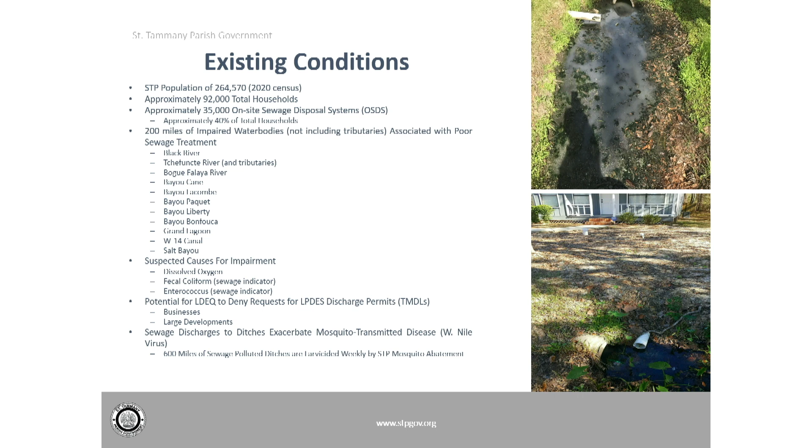This is a list of the impaired water bodies in St. Tammany Parish. It's called the 303D list. 303D is in direct reference to the section that this list is in the Clean Water Act, and it's maintained by the EPA. Now, I know you can't see that, so this next slide is a blow up of that.

So the left-hand column, the first yellow left-hand column, at the top it says PCR. That stands for Primary Contact Recreation. So each of those yellow N's means that that section of water body is impaired and is not meeting the primary contact use designation.

If you go all the way to the far right column, you can see what it's impaired for, the suspected cause of impairment. You can see sewage discharges in unsewered areas, on-site treatment systems, septic systems, and similar decentralized systems.

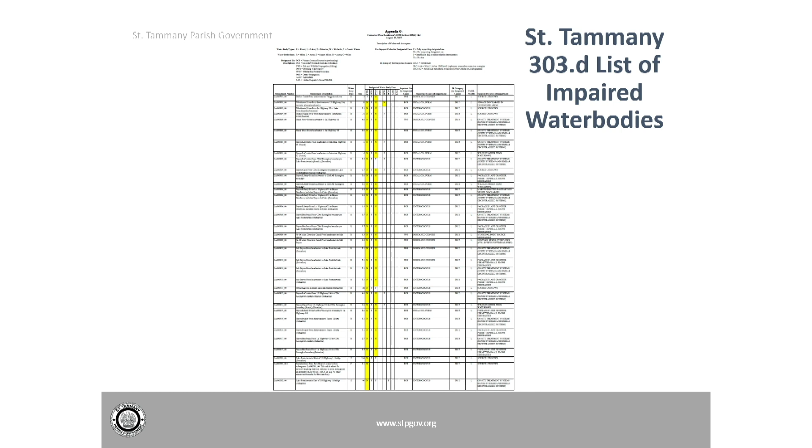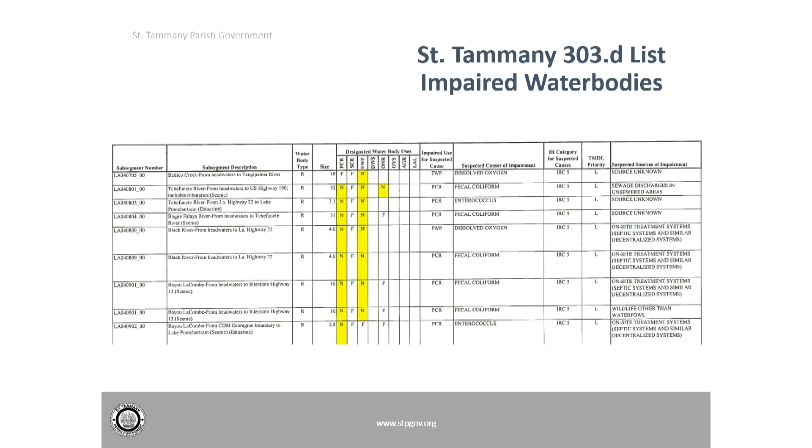Going back to that first column, you can see all of these river subsegments that are impaired for primary contact recreation due to these on-site systems. The second column is labeled FWP, which is Fish and Wildlife Propagation. Essentially, the water bodies that have the yellow N are not meeting the criteria to properly propagate fish and wildlife. That's typically because of a dissolved oxygen concern. The primary contact recreation concern is typically a bacteriological concern, fecal coliform or enterococcus.

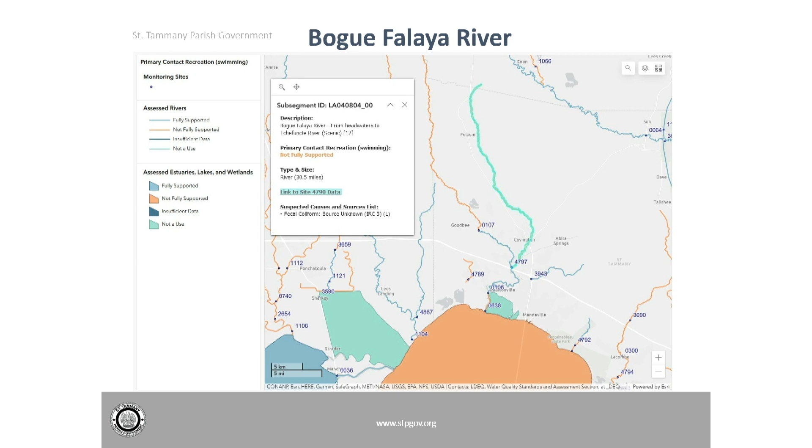Likewise, the Bogue Falaya River, source of impairment, fecal coliform. Bayou Lacombe, source of impairment, fecal coliform, on-site sewage systems. This is data collected from EPA and the Department of Environmental Quality. Bayou Liberty, fecal coliform. So what does all that mean?

We know about the potential health hazards with these bacterial loads in our waterways. We understand the consequence to fish and wildlife, but from an economic development standpoint, that brings us to this slide.

In this particular case, we had a small business along Highway 59 that was looking to get a discharge permit. They were only looking for 300 gallons per day, which is less than a single family household. Before they can get a building permit, they have to get an okay from the Department of Environmental Quality that they'll be able to get a discharge permit.

In this case, the business owner sent off their request to DEQ to get that okay. It's called a request for preliminary determination. And DEQ replied back with this letter, and you can see I've blown some portions up there.

The Tchefuncte River, essentially it's saying this does not meet its designated uses, is impaired, and the suspected cause is low dissolved oxygen. That middle section says the LPDES discharge permits may not be issued to a new source or new discharge in a subsegment which does not meet applicable water quality standards.

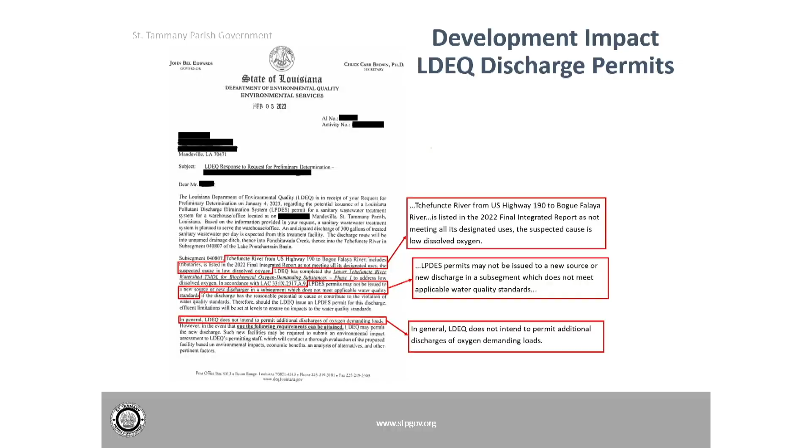And then in that bottom blow up, they really just kind of cut to the chase. They say, in general, DEQ does not intend to permit additional discharges of oxygen demanding loads. Well, any business that has a toilet is going to have an oxygen demanding load. So this is...

What all those impaired water bodies are leading to, where if we want to continue to have businesses develop in unsewered areas, they may not be able to get a discharge permit.

Some of you may be familiar with the current on-site inspection program. That is based on electrical transfers and property transactions. My department currently does about 2,000 of these each year. The current inspection fee is $100, and before someone can have the electrical service transferred into someone else's name, they have to have the permit from Environmental Services.

The most common reasons for failure is that the system needs to be pumped out, the aerator's not properly working, it's unpermitted through the state, or there's a structural issue that's causing it to not function properly. Approximately 47%, about 50%, fail the initial inspection.

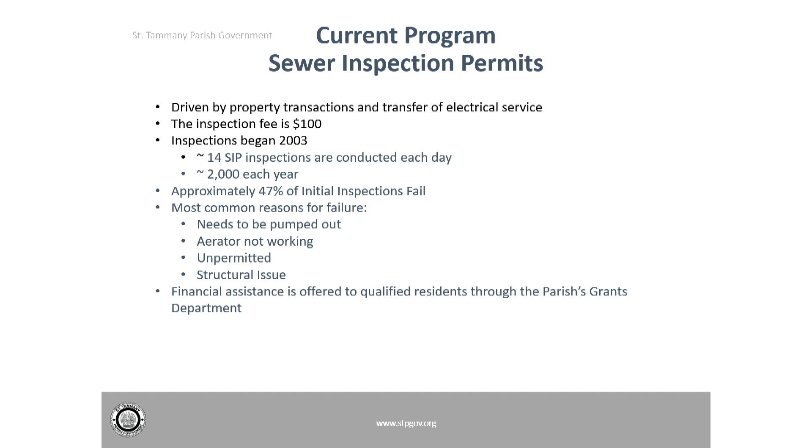The parish also currently offers financial assistance for people who need to either repair or replace their systems, for people who qualify.

The proposed program is going to build off of the current program, but eventually will take its place. It will no longer address or be associated with the electrical transfers.

Under the proposed program, residents that are currently connected to a community sewage system are not subject to this ordinance. Residents in unincorporated St. Tammany Parish will have to have their on-site system inspected every 3 years, and the inspection fee will remain at $100.

Systems that pass will be issued a certificate of compliance that is valid for 3 years. Systems will be inspected to confirm that they are functioning sewage treatment systems. That's what we'll be looking at. We won't be taking samples. We won't be looking to see if there are any kind of paperwork issues with the system. We'll simply be going out to make sure that there's a functioning sewage treatment system on the property.

The most common expected reasons for failure would be that it needs to be pumped out - that's a routine maintenance item. That the aerator is not working - again, that's a routine maintenance item. And if there are any kind of structural issues that are preventing it from functioning properly.

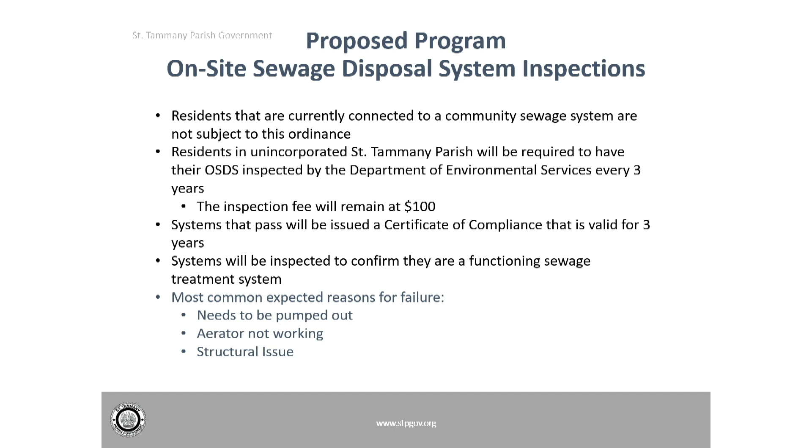Now, there will be exemptions to this program. Systems that are operating in a manner that results in no off-site discharge of wastewater effluent, i.e. the disposal is realized within the boundaries of the property, they will be exempt. The initial inspection will be required to confirm no off-site discharge.

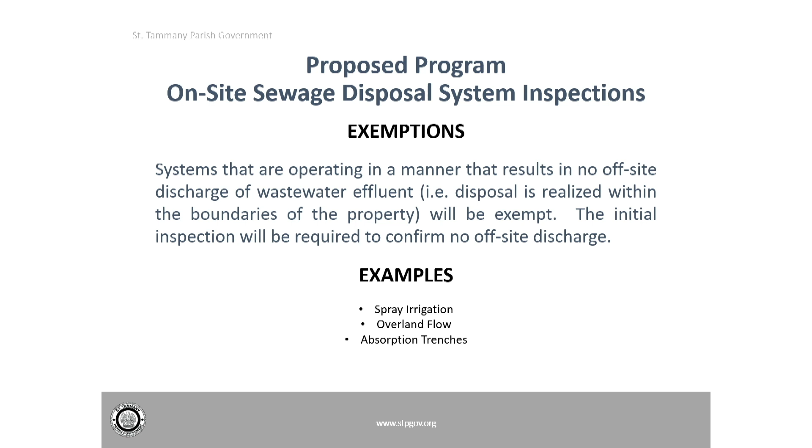Examples of the exemptions are spray irrigation, overland flow, and absorption trenches. Here are some examples of things that would qualify for that exemption.

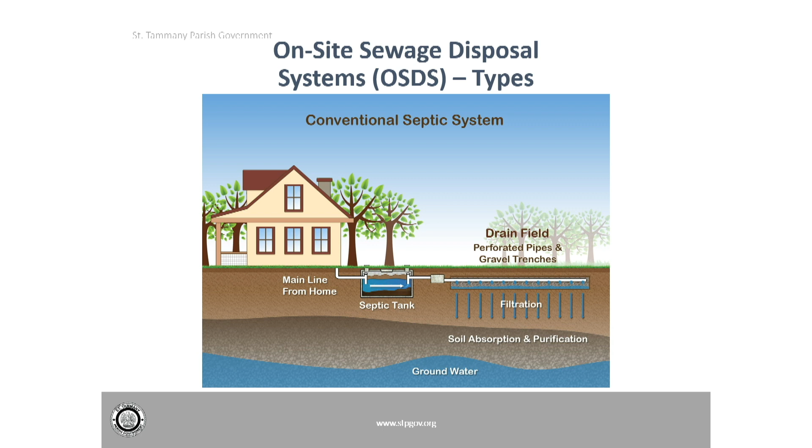Here you have a conventional septic tank. The wastewater flows from the house to the tank and then goes into the drain field, and there is no off-site discharge. This would be exempted under this proposed ordinance. And this is a great method of treatment.

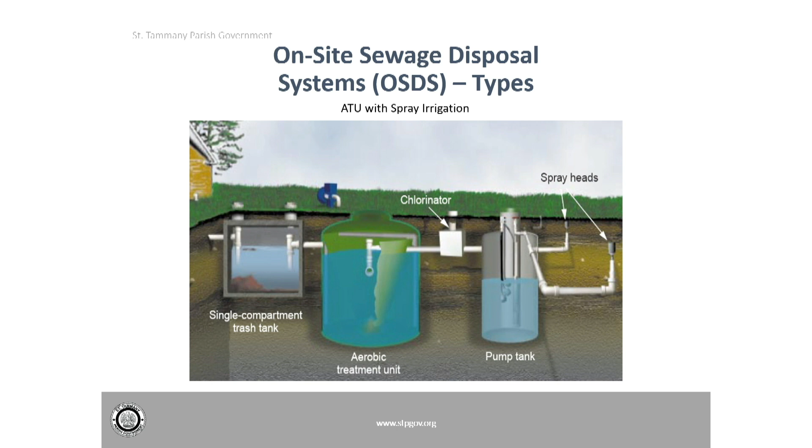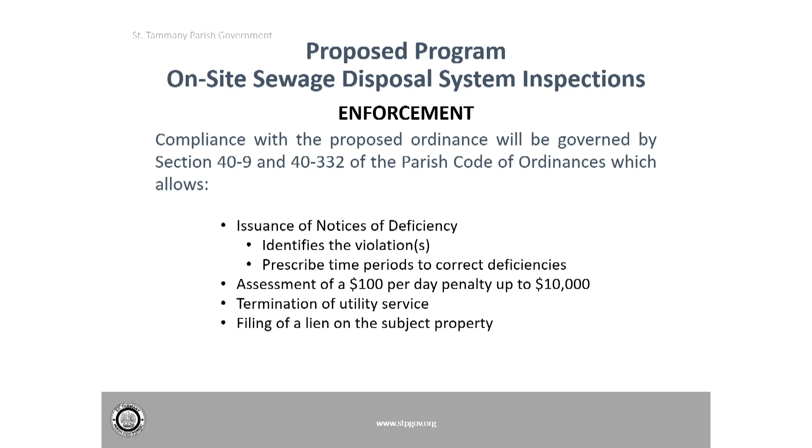The goal is to work with people and try to improve the water quality in St. Tammany Parish. We're going to go out of our way to try to work with people to bring them into compliance and help them. Homeowner education is a bigger component of this than is enforcement, because a lot of people don't know how to properly take care of their systems.

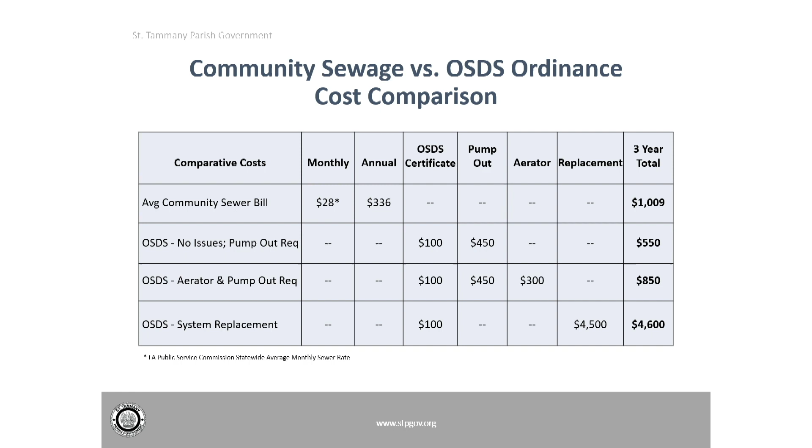Keep in mind that based on the system you have, some of these prices will vary—some higher, some lower. These are just averages. If you have to have a system replacement, those are running about $4,500 with the $100 certificate fee, so you're looking at $4,600 over 3 years.

That brings us to financial assistance. I already mentioned we provide assistance to low to moderate income folks for repairs and replacements. We're looking to expand that package, working with the Department of Environmental Quality to utilize their clean water state revolving funds. Essentially, the parish would take out a loan from the state and pass that through to people with structured payment plans for those who don't qualify under low to moderate income. Some of the state revolving loan funds will also be forgivable. The parish, through our grants department and environmental services, is currently working with DEQ to structure this financial program.

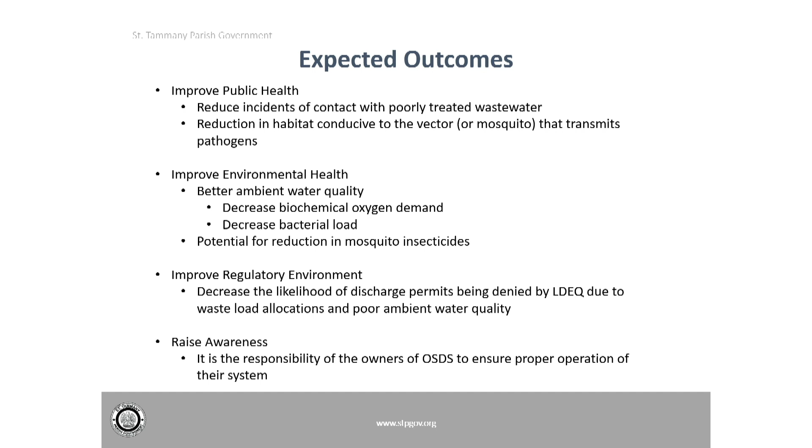The results from that program: we did before and after sampling, not of individual residents, but at two locations indicated on the map. At the location where ditch water was leaving the subdivision at BL3, we saw a 49% reduction in BOD, biochemical oxygen demand, and an 18% reduction in fecal coliform. At the location on the east side of the subdivision, we saw a 65% reduction in BOD and a 36% reduction in fecal coliform.

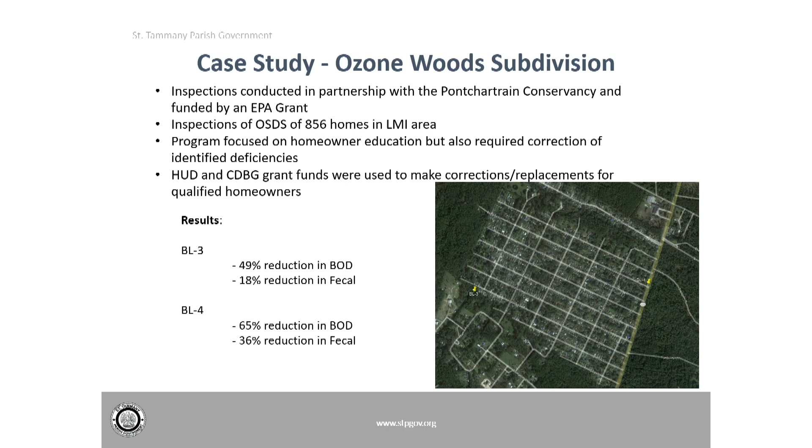The state and federal government are watching what we do here in St. Tammany Parish and are encouraged by the actions we're taking. We've also been contacted by other parishes asking us to keep an eye on how this proposed ordinance progresses, because they too have the same problem.